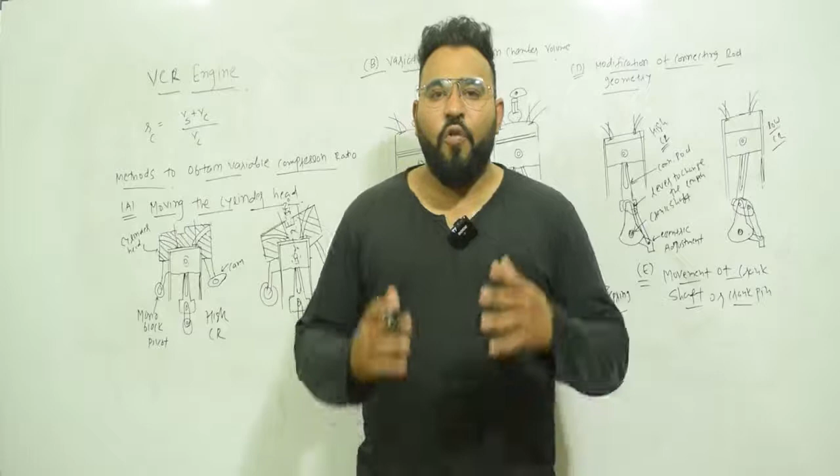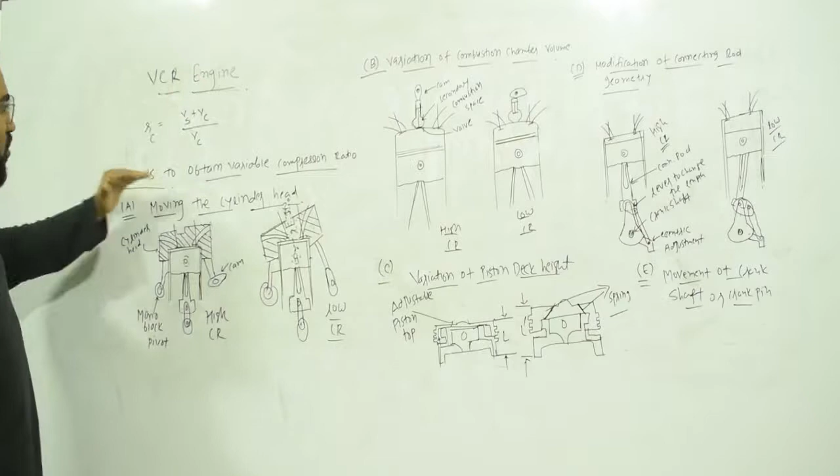Hi students, in today's video we are going to cover a very important topic for the GTU examination, that is the VCR engine, meaning variable compression ratio engine, and the methods to obtain variable compression ratio. This is a very important topic as far as the GTU examination is concerned. So now, what is a VCR engine? That is what we need to learn.

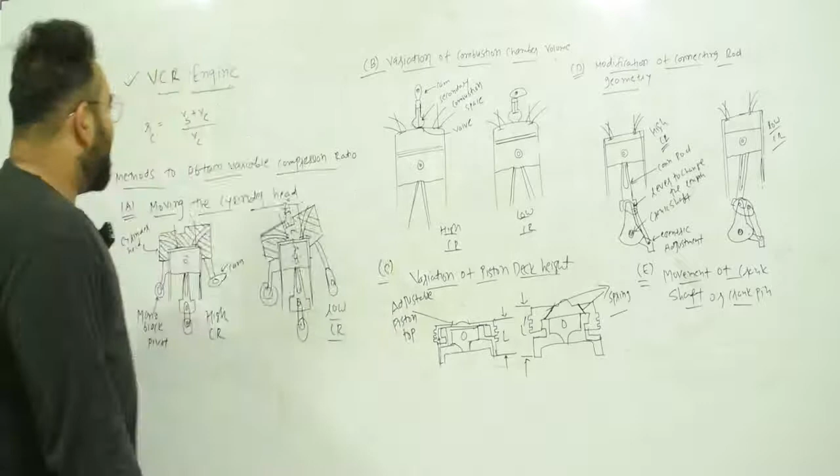Before we start the VCR engine, it is very important that you know about the compression ratio. You have already studied compression ratio in the basics of mechanical engineering and in thermodynamics, but let me revise it again. So what is compression ratio? Compression ratio is equal to total volume to the clearance volume, or total volume to the combustion chamber volume. Total volume is swept volume plus clearance volume, upon clearance volume, or instead of clearance volume you can say combustion chamber volume.

So now what is this? Take one cylinder. Here is the inlet valve, this is the exhaust valve, and let's say this is the position up to which the piston can go to the maximum height. And this is the bottom dead center, the lowest position up to which the piston will go. Now you can see that the total volume is up to this, but you cannot go up to this extreme position.

Why not up to the extreme position? Because here the inlet valve is there, the exhaust valve is there, and also the spark plug is provided here for combustion. So you cannot go to the extreme position; you have to leave some space. This space is intentionally left behind so that the combustion will take place here. This space which is intentionally left behind is known as clearance volume, or combustion chamber volume.

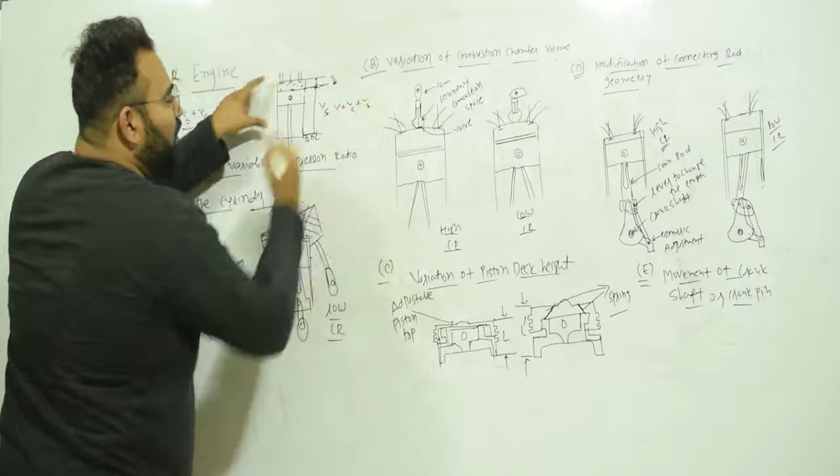Here the combustion is going to take place, and the volume covered by the piston, from here to here, is called swept volume. So now you will get to know the total volume. Total volume is clearance volume plus swept volume. That's why compression ratio is equal to total volume upon clearance volume, or combustion chamber volume. So this is the total volume.

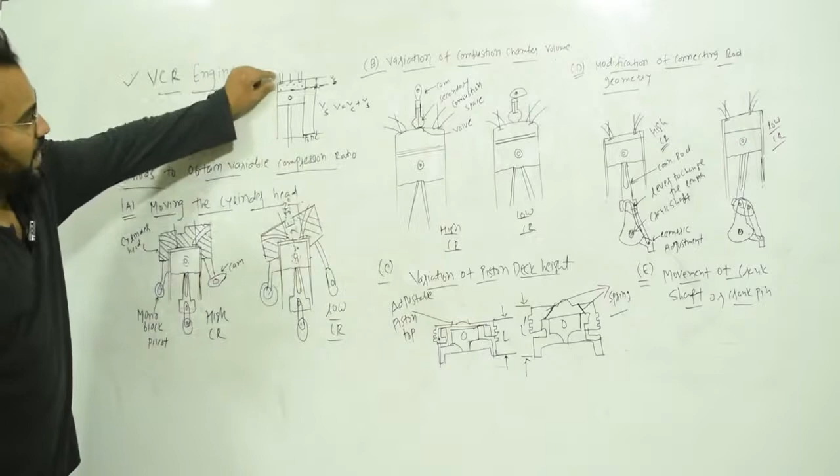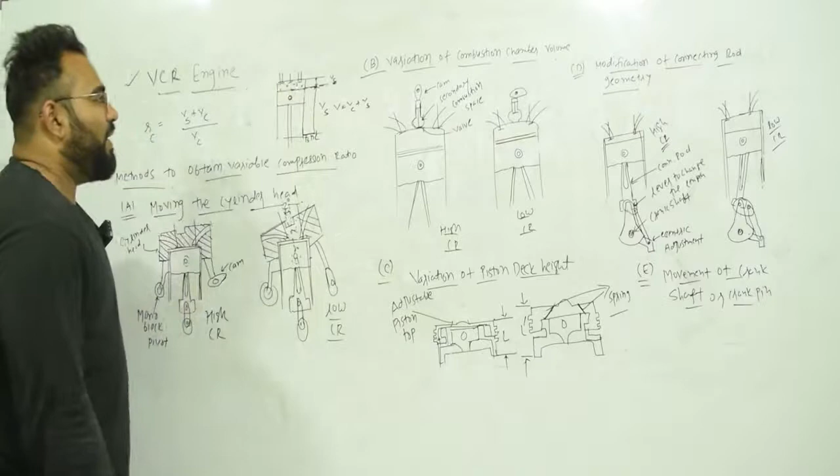So this is swept volume and this is the combustion chamber volume. Swept volume is the volume covered by the piston, and the combustion volume or clearance volume is intentionally left where the combustion is going to take place. So this is the compression ratio: total volume upon combustion chamber volume, or clearance volume.

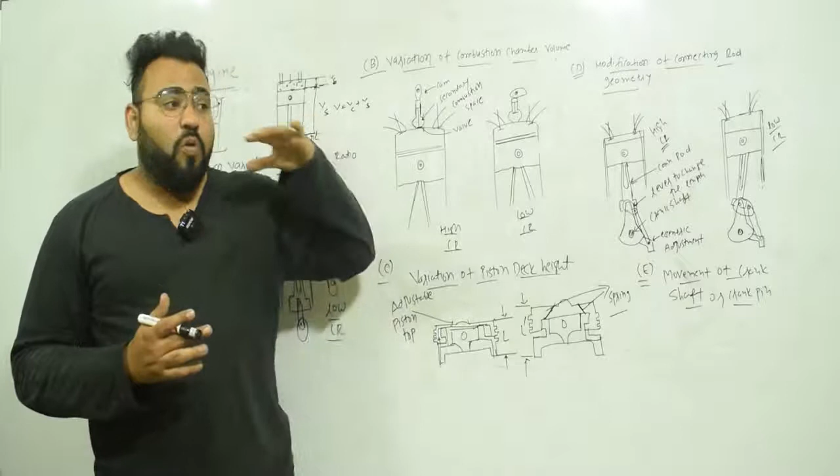Now we go on to what a VCR engine is. Till now, every engine has a fixed compression ratio. Let's say a particular engine is working on a fixed compression ratio. There are situations when the load varies, and it is not necessary that the engine should work at the predefined compression ratio. Sometimes, for good thermal efficiency and good economy, it is necessary that according to load it should be able to vary its compression ratio,

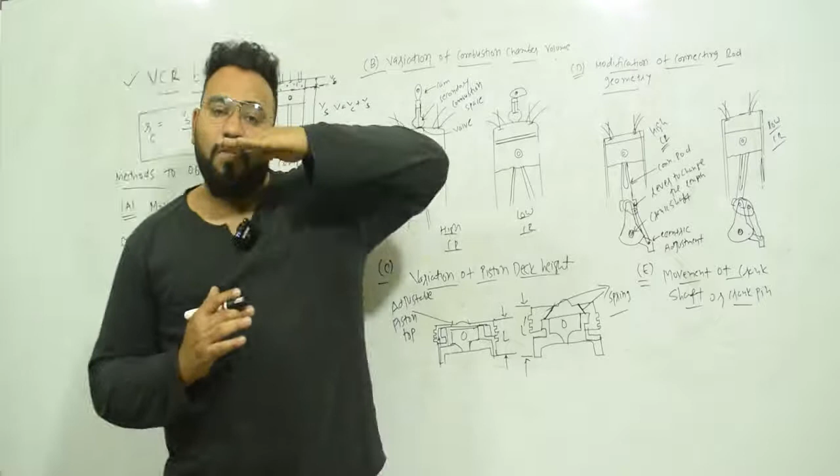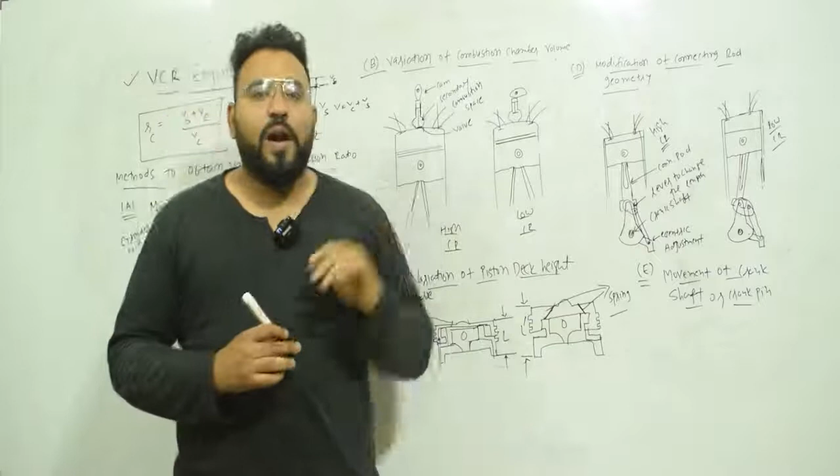because sometimes you require a high compression ratio, and sometimes you require a low compression ratio. If the engine is working with a fixed compression ratio, it cannot change according to requirement, and then you will not have good efficiency or good fuel economy. So they came up with the idea: why can't we make an engine which can change its compression ratio according to the requirement? That engine is known as a variable compression ratio engine, or VCR engine.

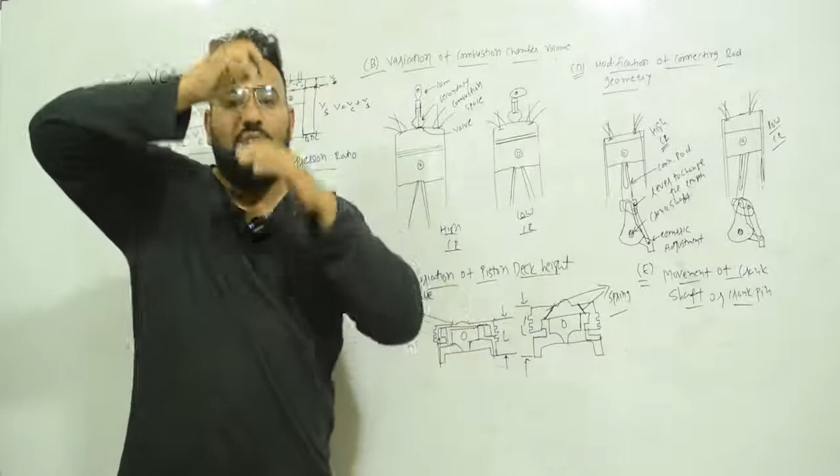So according to requirement, you are going to change the compression ratio. This engine is intelligent enough that it senses what the requirement is. If there is a requirement of high compression ratio, it can change its combustion chamber volume accordingly, or if there is a low compression ratio requirement, it can change the volume of the combustion chamber according to that.

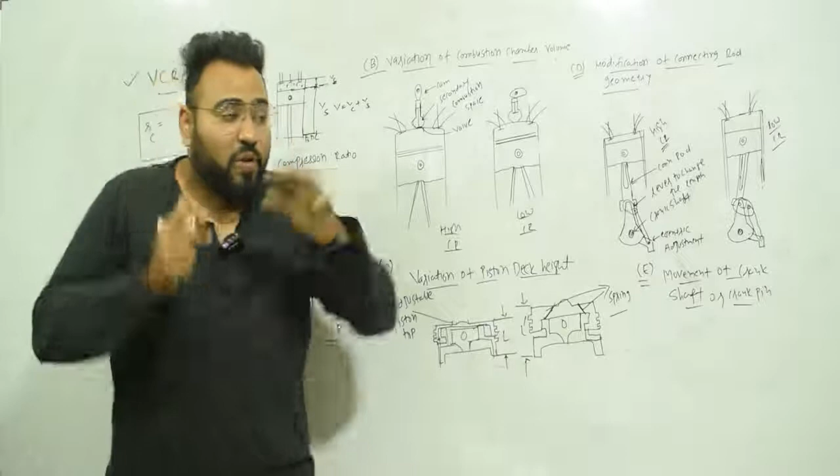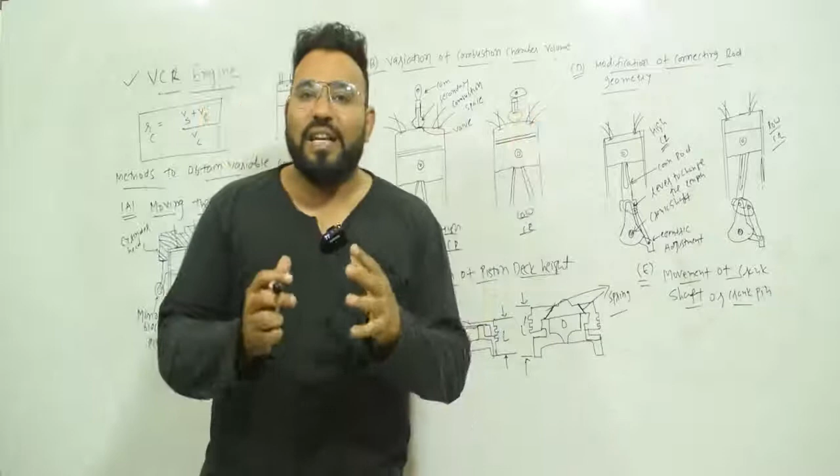So till now, the old engines ran on a fixed compression ratio and could not change their compression ratio according to requirement. Now here comes the engine with modern technology which can change its compression ratio according to the requirement. This engine is capable of varying its compression ratio according to requirement, and that's why it is known as a VCR engine.

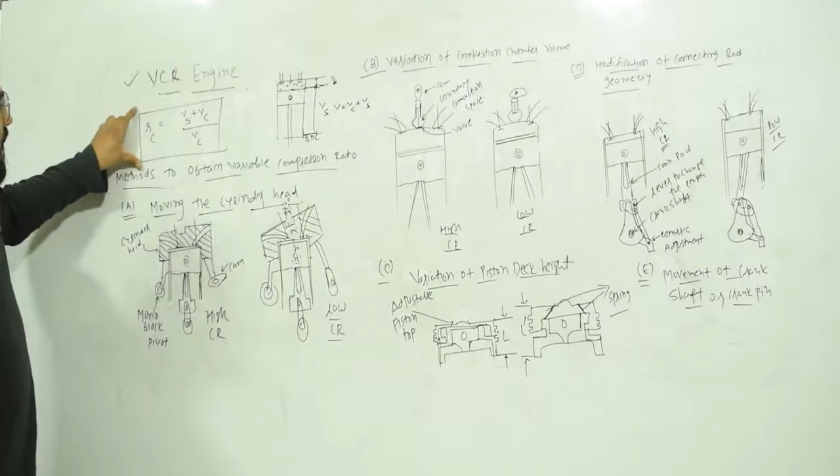So this is known as VCR engine, and now you know what compression ratio is. If you want a high compression ratio, then from the equation you can tell me that you have to decrease the volume of the combustion chamber. And if you require a low compression ratio, then you have to increase the volume of the combustion chamber. So if you know this concept, then you can easily understand the concept of the VCR

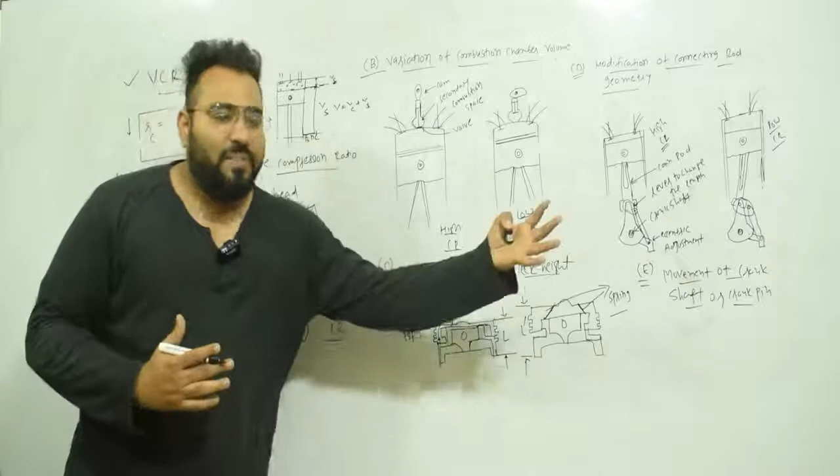engine. So now let's see what are the methods to obtain variable compression ratio, how this VCR engine varies its compression ratio according to the high or low compression ratio requirement. Method number 1 is moving the cylinder head. By moving the cylinder head, you can change the compression ratio.

So here you can see this is the piston, this is the connecting rod, the crankshaft is over here, and this is the cylinder head. This is the inlet valve, this is the exhaust valve, and this is the piston. Now in this, this is your combustion chamber volume, or you can say the clearance volume.

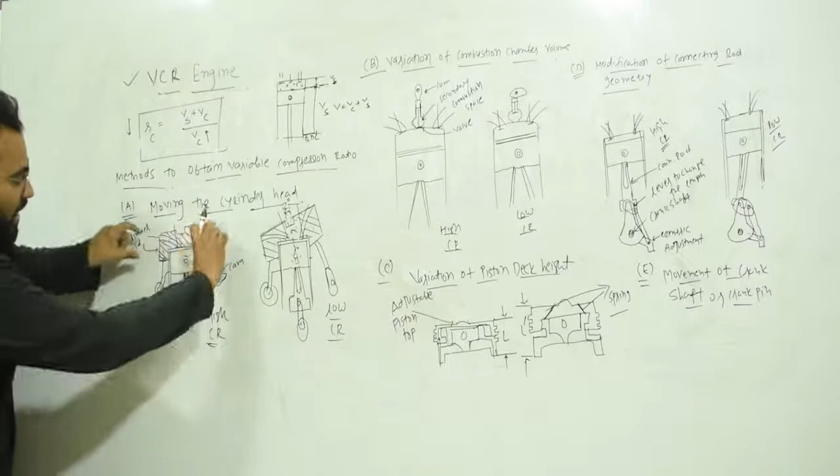Now what is the arrangement? They came up with the idea: why can't we change the position of the cylinder head? The cylinder head here is horizontal, so why can't I tilt it and change the angle? If I change the angle, there is a chance of increasing not the cylinder head volume, but the combustion chamber volume. So they're going to tilt it, or change the angle of the cylinder head like this.

But how are they going to do it? With the arrangement of a cam and monoblock pivot. The cam changes the angle of the cylinder head with the help of this monoblock pivot. Right now you can see there is a 0-degree angle, and this is the high compression ratio. High compression ratio means you require less combustion chamber volume. So this is the high compression ratio requirement.

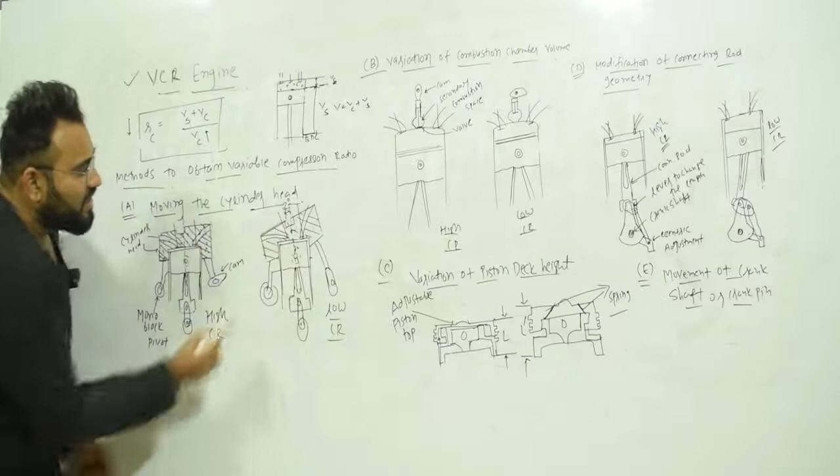If I want a low compression ratio, then I have to increase the combustion chamber volume. How can I do that? They're going to change the angle. Here you can see the vertical line and a 2-degree angle. They have moved the cylinder head by some angle with the help of this cam and pivot arrangement.

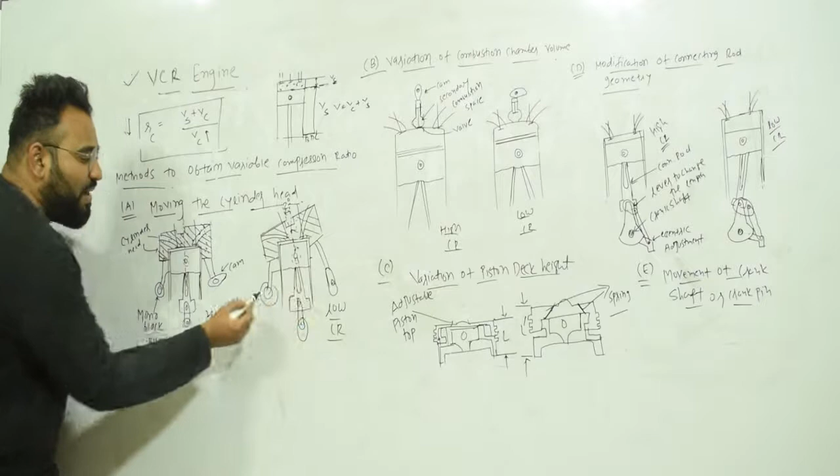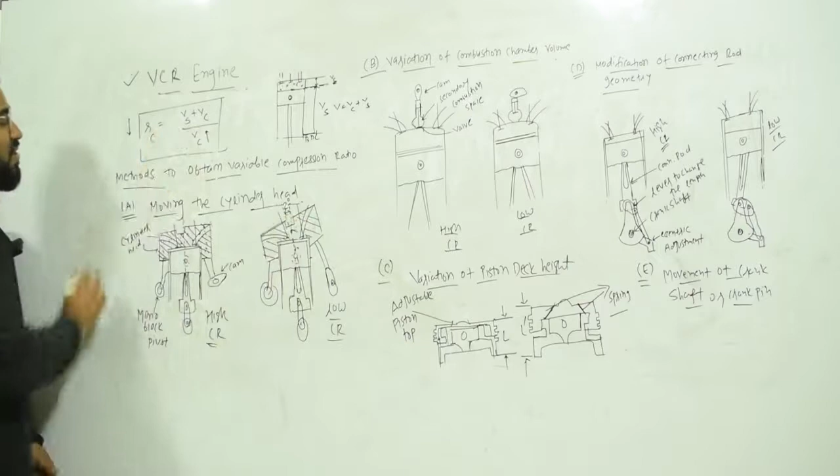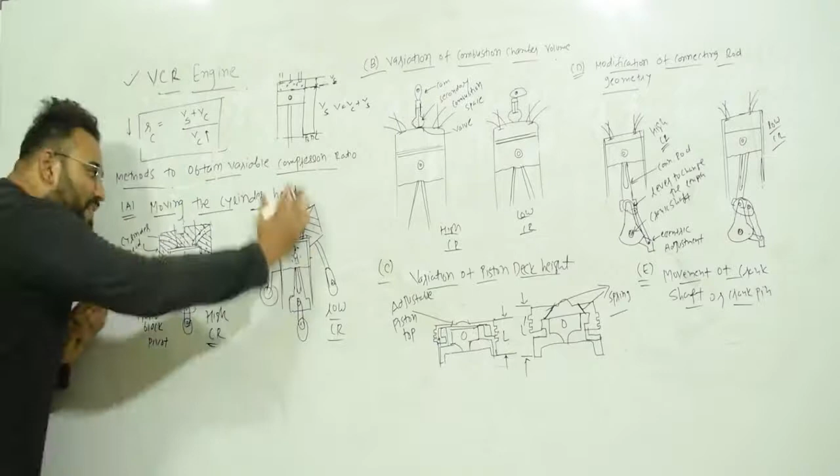By doing this, you increase the combustion chamber volume, and if you increase the combustion chamber volume, your compression ratio will decrease. So this is the low CR. If they require low CR, the arrangement will be like this, and if they require high CR, the arrangement will be like this. So by moving the cylinder head, you can change the compression ratio according to the requirement.

Now the second arrangement, which is variation of combustion chamber volume. Here they change the volume of the combustion chamber. You can see the cylinder and the piston. They have provided extra space over here, and there is one valve which is operated with a cam. So they have provided a secondary combustion space.

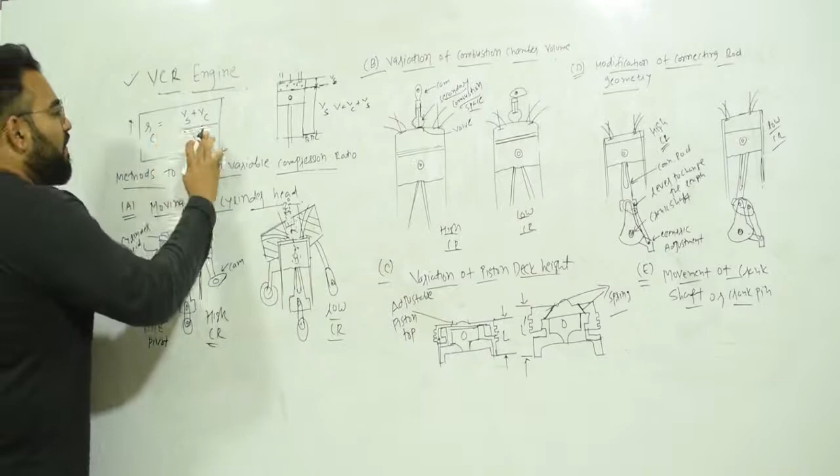If you want a high compression ratio, your combustion chamber volume will be less. So if they require high compression ratio, the valve will be in the closed position, and your combustion volume will be up to this. But if you require a low CR, then you have to increase the combustion chamber volume.

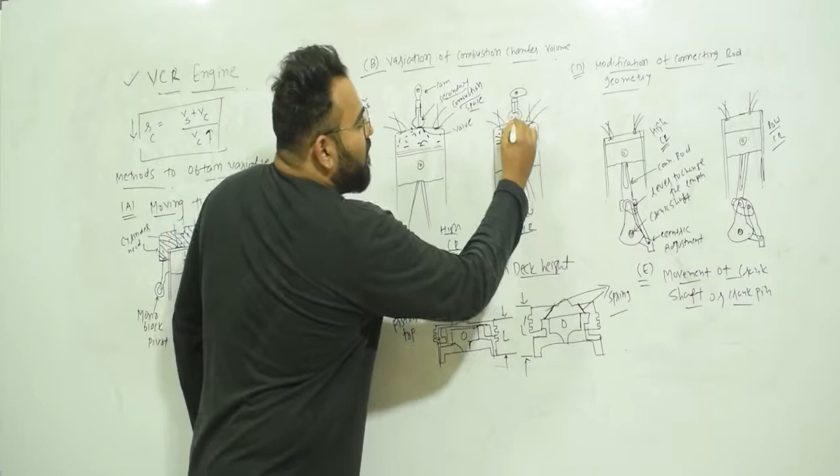So what they're going to do: this valve, which is over here, will go up, and now this volume will be increased from here to this. Now it will go up to this. So now the combustion chamber volume increases and your compression ratio decreases. So for low CR, it will be something like this.

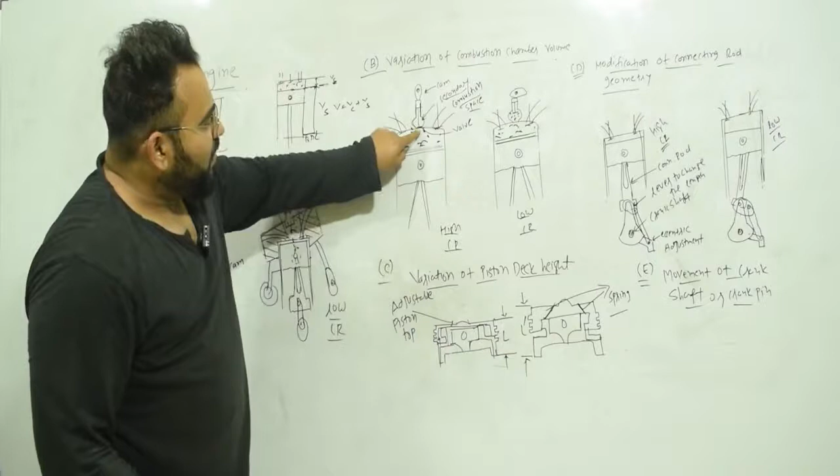So they have provided some secondary combustion space. If there is a high CR, then this space will remain closed. But if you require low CR, then you have to increase the combustion chamber volume. So this valve will go up and you will have extra space over here. By doing this, you can increase the combustion chamber volume. So this is the second arrangement.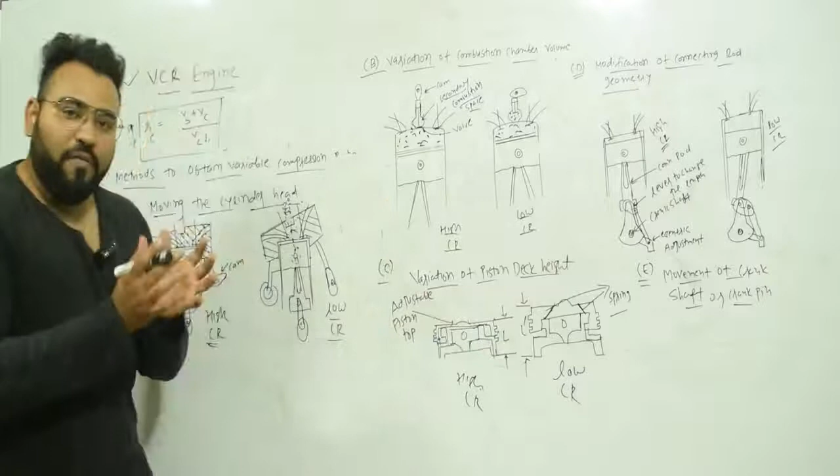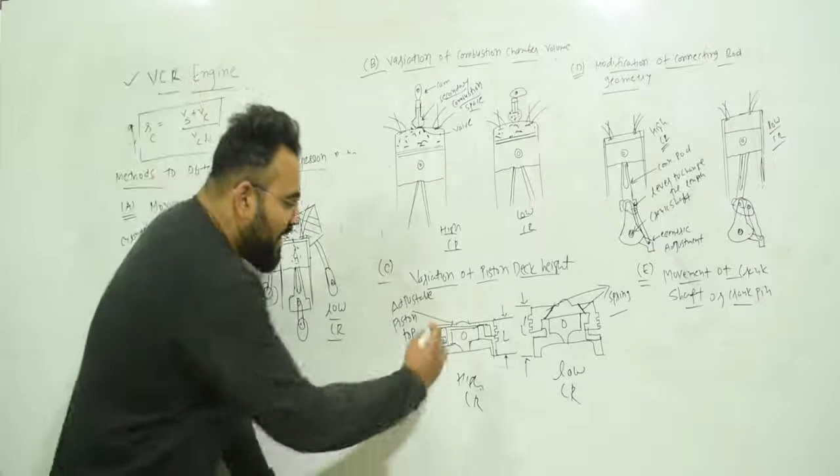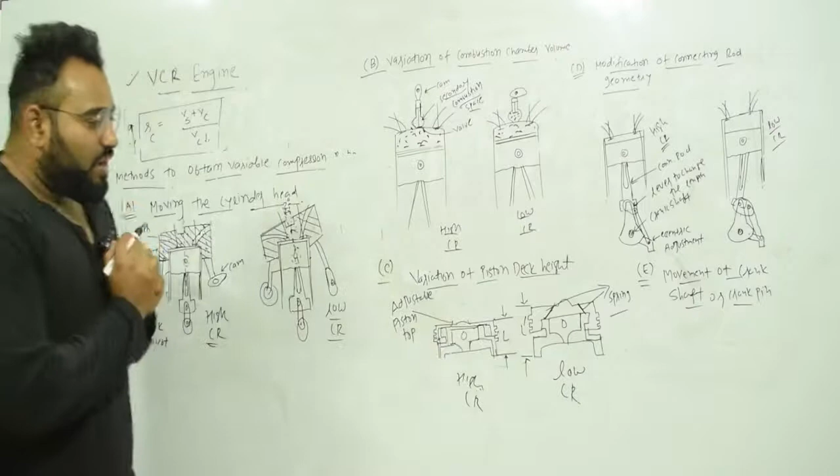Now we're going to see the third method, which is the variation of piston deck height. They came up with the idea: why can't we make an arrangement where we can increase the length of the piston top? You can see this arrangement over here. This is the adjustable piston top, or you can say the crown. So they came up with the idea to increase the piston length so that we can change the compression ratio.

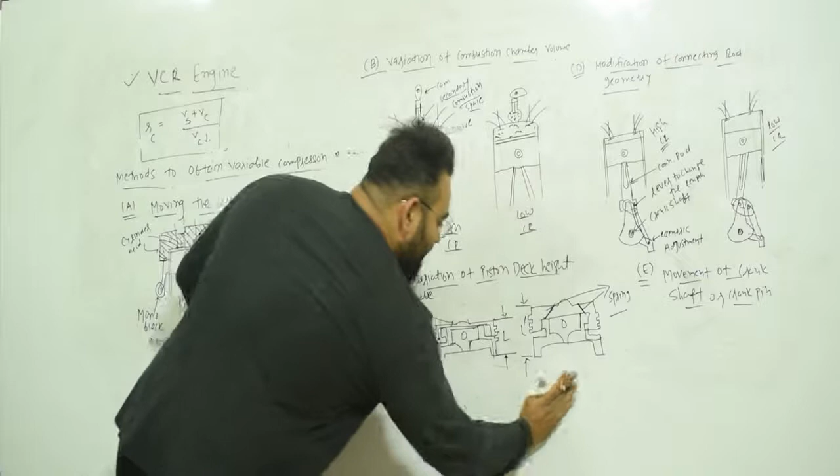Let's say they require a low compression ratio. If you require a low compression ratio, then what do you do? And if you require high CR, then what do you do? Let's say you require a high compression ratio. Then you have to decrease the combustion chamber volume. So what are they going to do?

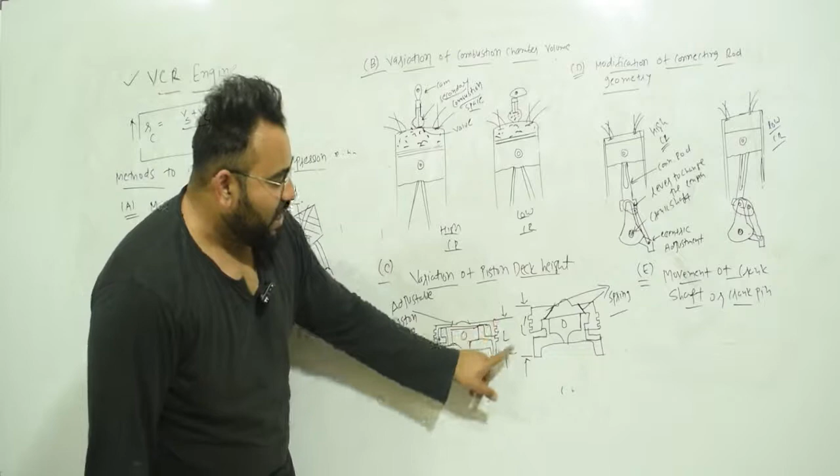They have an adjustable piston top over here. Here you can see the length of the piston is L, and here a hydraulic arrangement is provided. Whenever they want to increase the piston length, a spring is provided over here for increasing the piston length. Here the length of the piston is L, but here the length of the piston increases from L to L dash.

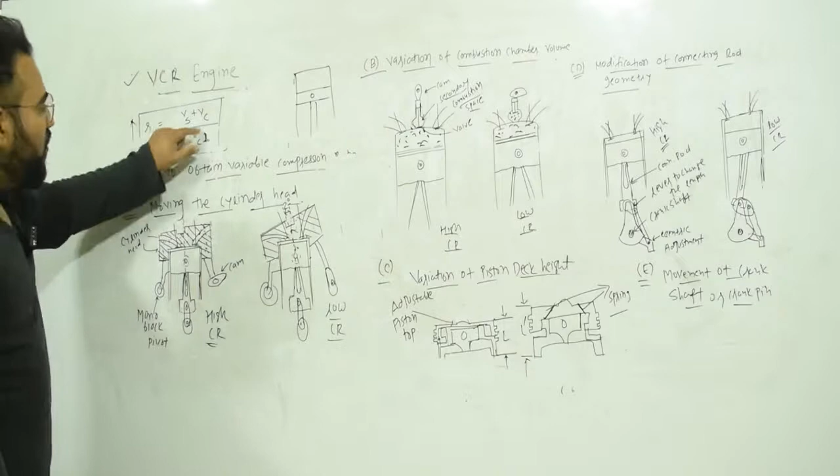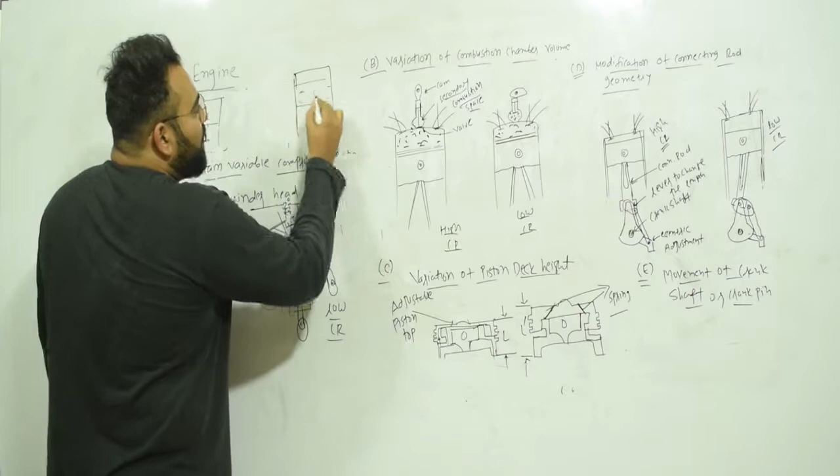So now what will happen? Let's say this is the cylinder, this is the piston, and here is the normal condition. Now you require a high compression ratio. Then you have to reduce the combustion chamber volume. So this is the adjustable piston top. Now they're going to increase the length of the piston, and now your combustion chamber volume is going to be decreased. By decreasing the combustion chamber volume, they get a high compression ratio.

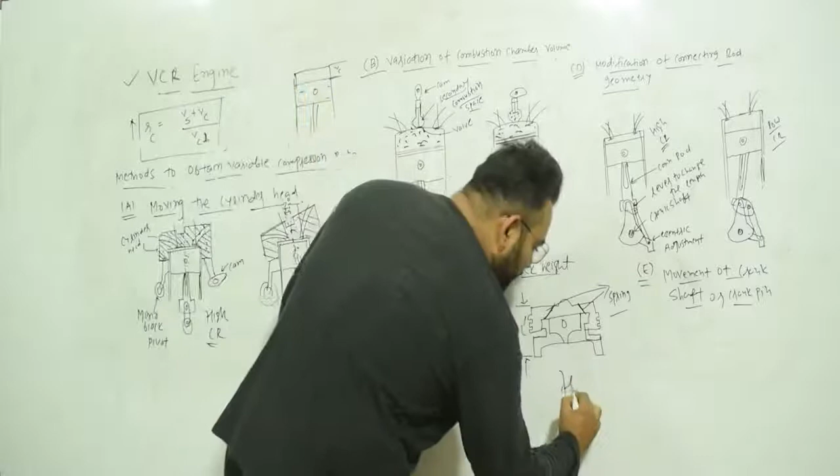So for high CR, it works like this, and for low CR, you know that if you require a low compression ratio, then the combustion chamber volume should be increased. So this is the normal condition, this is for low CR, and for high CR it works like this. Okay, now the next method is modification of connecting rod geometry.

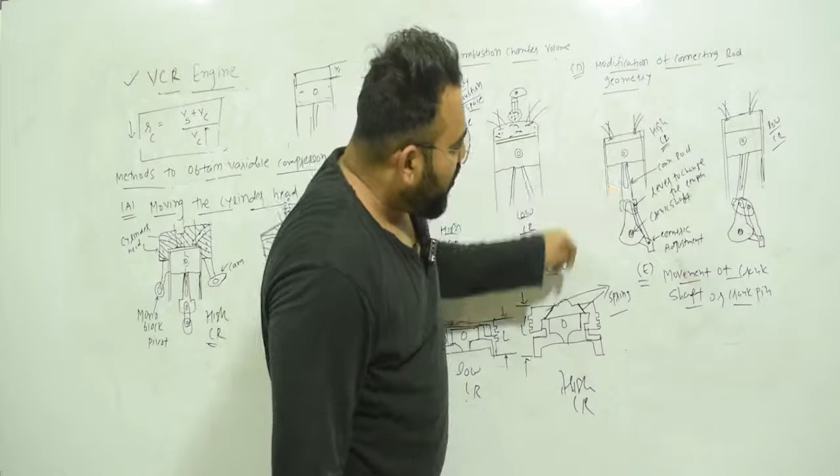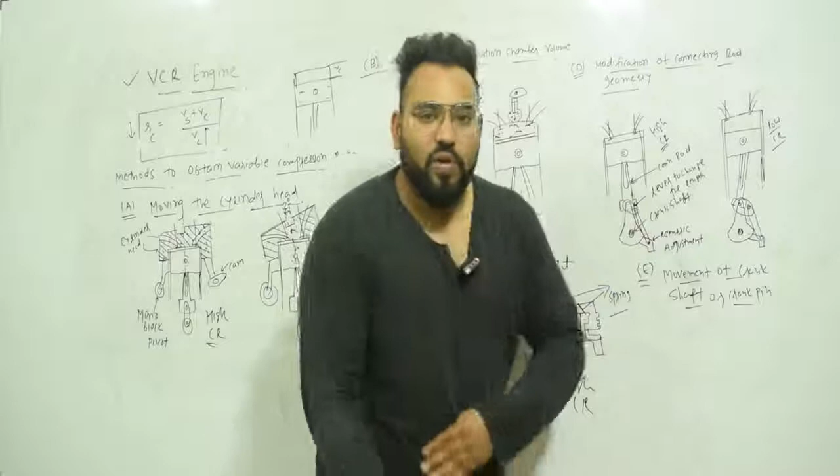Here they're going to vary the length of the connecting rod. Here you can see the piston arrangement, the inlet valve, the exhaust valve, the connecting rod, and the crankshaft. They have provided one lever over here, and this lever is connected with this eccentric arrangement. This lever will increase or decrease the length of the connecting rod according to requirement.

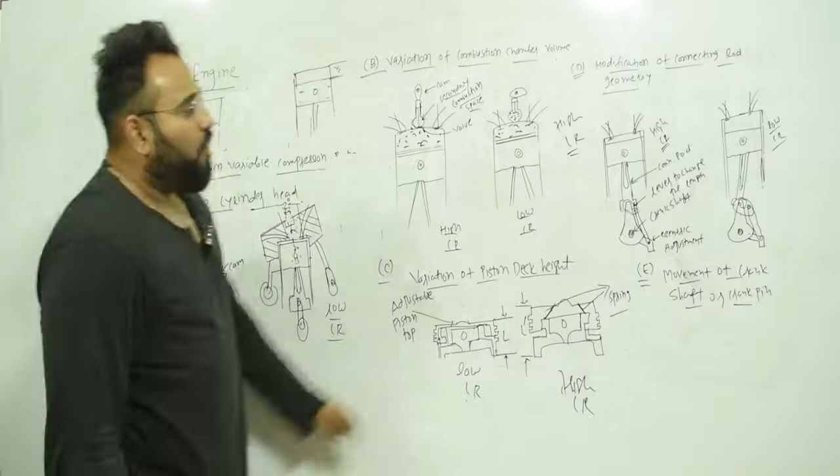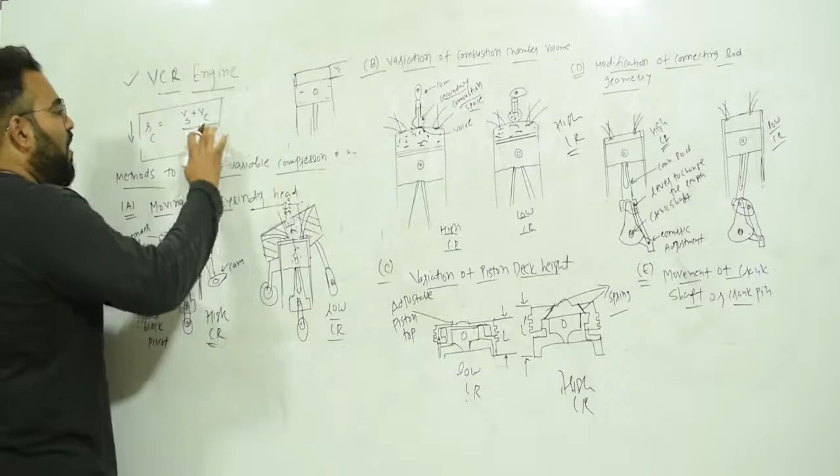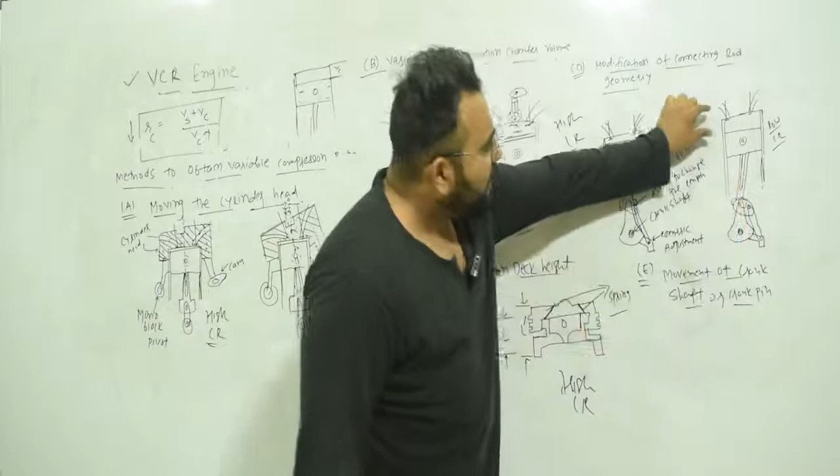For high CR, you know you require less combustion chamber volume. So for high CR, the length of the connecting rod is such that your combustion chamber volume will be like this. But for low CR, your combustion chamber volume should be increased. So they adjust the length of the connecting rod with the help of this lever arrangement, and now your combustion chamber volume is increased compared to over here, and you get the low CR.

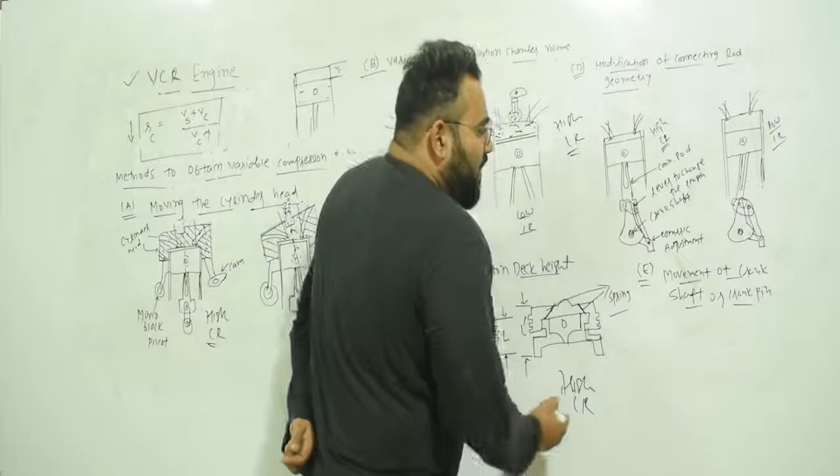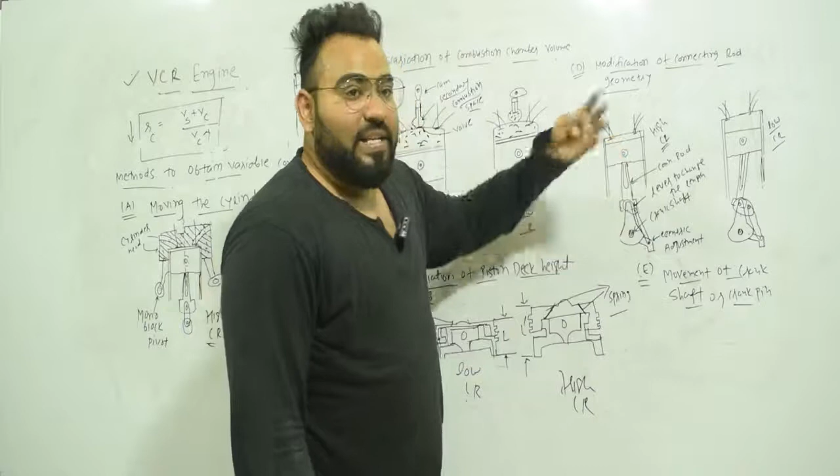So they provide this lever arrangement which is linked with this eccentric arrangement. There is a linkage arrangement over here such that you can vary the length of the connecting rod. According to that, you are increasing or decreasing the combustion chamber volume, and by doing this you are getting low or high compression ratio according to requirement.

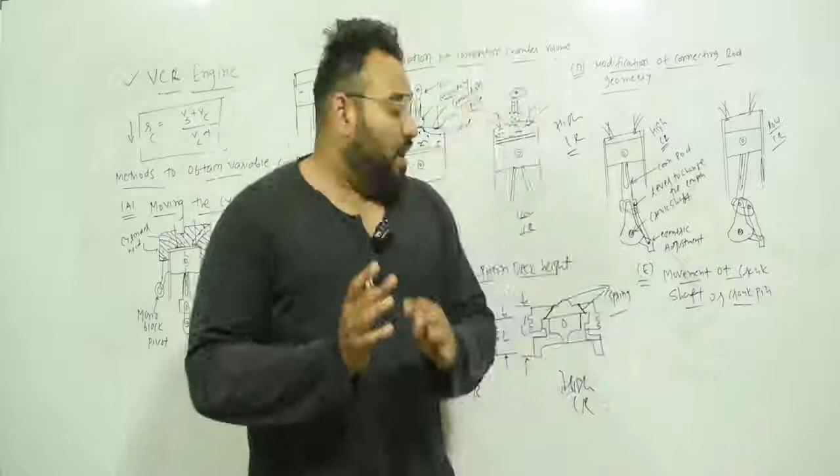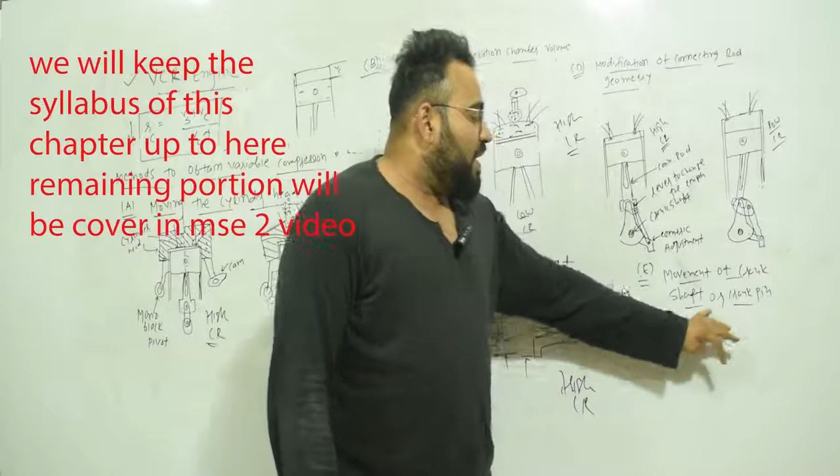The last method is movement of the crankshaft, or you can say crankpin. Similarly, as with the connecting rod, by providing some linkage arrangement and controlling the movement of the crankshaft or crankpin, you can do the same. So these are the different methods for obtaining variable compression ratio.